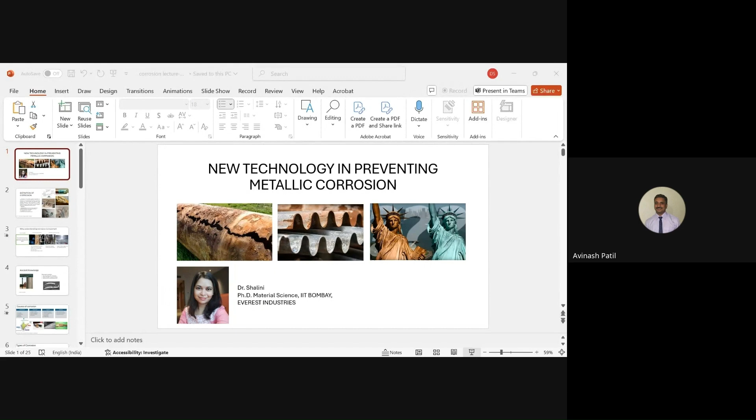Can you see my presentation? Yes, madam. So today's topic is on new technologies in preventing metallic corrosion. Madam, just interrupt, make it PPT view. Yes, I did, it is in PPT view only. Full screen is not there. Okay, let me. The corner icon, yeah that one. Can you see now full screen? No, madam, or else you have to share the entire screen. Okay, okay, I will do that. Just a second. Is it okay now? Yes, yes, it's okay now, you can continue madam.

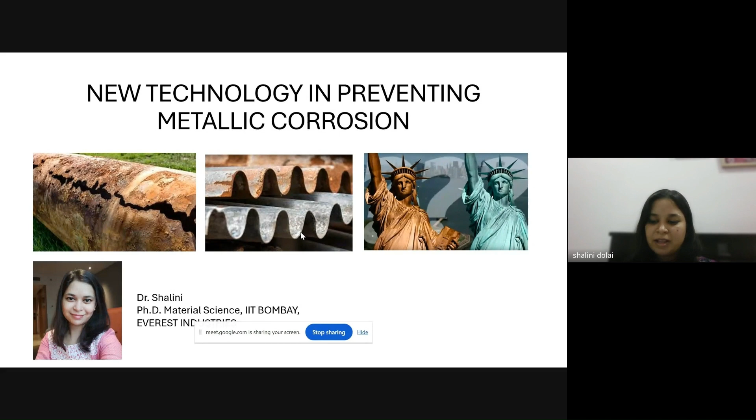Thank you. I don't know how many of you are aware of material science and the corrosion stream. It is not a very common subject, but there is a huge demand for this role in India. We have been looking for material scientists, electrochemists, and corrosion engineers in our field, but it is extremely difficult to find them. So in future, if you want to do your masters and PhD, this could be a potential subject, because today I'm going to present how we solve some industrial problems with this knowledge.

Before going into the case studies, I would like to give a small introduction on what is corrosion and why it is important to understand it. Corrosion, in simple terms, is a reaction of any metal with oxygen, carbon dioxide, humidity, or any pollutant in the atmosphere, and this metal gets converted into oxide, and that metal oxide will have detrimental properties which can lead to a lot of accidents. That is called corrosion in general terms.

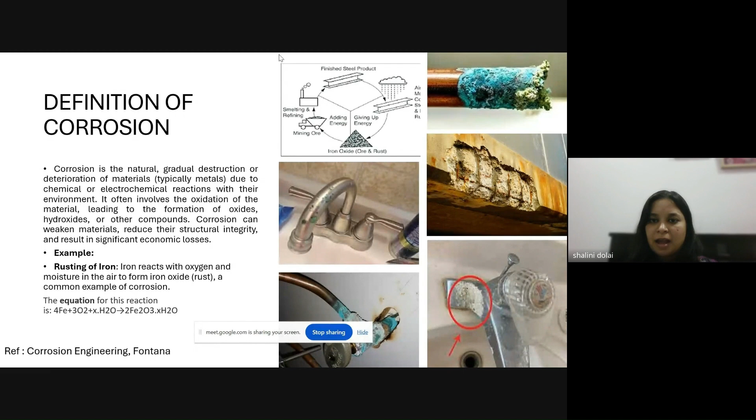But in terms of thermodynamics, I will take an example of iron. Iron is usually present in nature as magnetite or iron oxide. So what happens to iron? We usually extract it from iron ore, which is an oxide, either hematite or magnetite. Then we apply a lot of energy to convert it into pure iron. Now this pure iron has acquired energy in the smelting process, and it becomes unstable, looking for a chance to go back to its original form, which is iron oxide. So whenever there is humidity, chloride, or any pollution in the atmosphere, it reacts: iron reacts with oxygen and humidity and becomes iron oxide. This is the natural behavior shown by almost all metals.

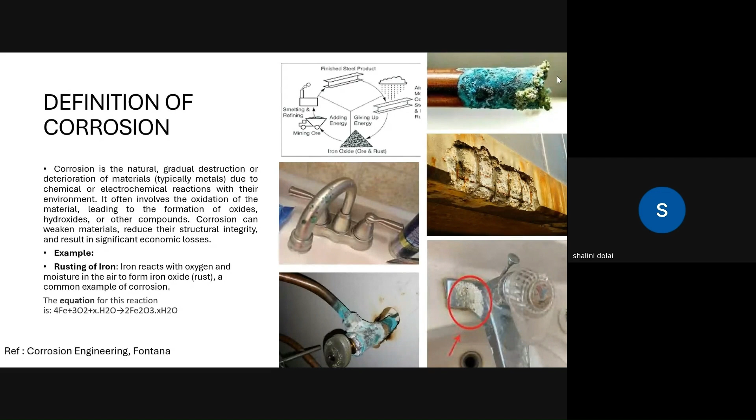So when iron corrodes, it will show red rust. When zinc corrodes, it will show white rust. When copper corrodes, it will show blue color. Can anybody guess why copper rusting shows green or blue color? Copper carbonate, yes. What happens is copper reacts with carbon dioxide in the atmosphere, or it will react with SO2 in the atmosphere and forms copper sulfate. Both of them have green or blue color, that is why we see this bluish color. So this is the basic corrosion mechanism.

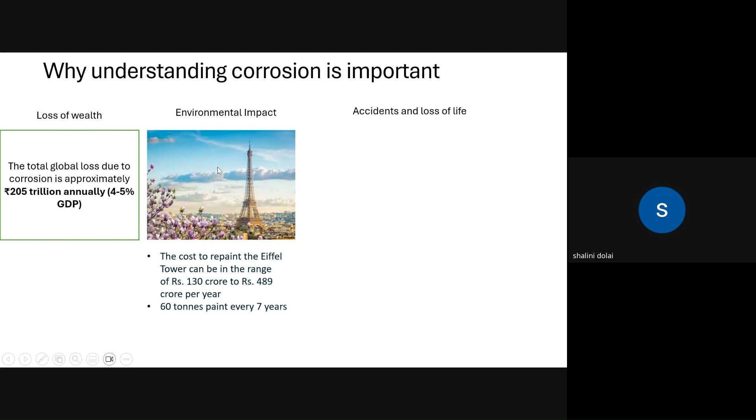And why should we study this topic? Because the global loss due to corrosion is 205 trillion rupees, which is 4 to 5% of GDP, which is huge. With the knowledge of corrosion, this can be prevented, and it also has a lot of environmental impact. You all love the Eiffel Tower, right? And it looks beautiful, but if you go near it and see it, this is how it looks, because it is made of wrought iron and is highly vulnerable to corrosion.

And Paris spends almost 130 crore rupees per year to repaint it. Almost 60 tons of paint get consumed every 7 years. The kind of VOCs that are generated due to this paint have a huge environmental effect. And there are accidents and loss of life.

One example is the Bhopal gas tragedy, where the metal pipes were corroded due to this MIC gas. There was no monitoring, due to which the leakage happened and many people lost their lives. This could have been prevented.

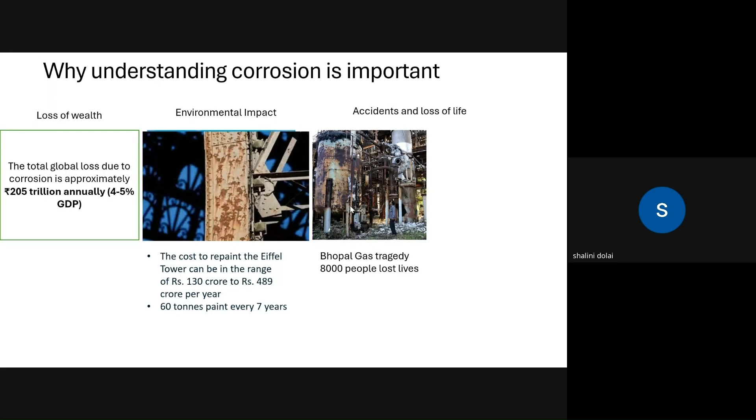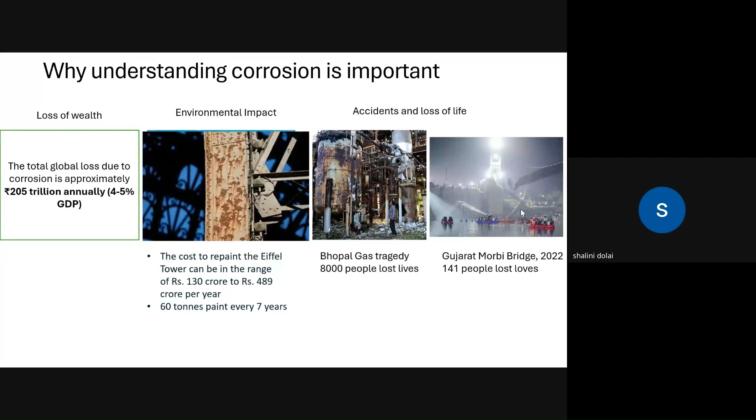And you may think that these are very old cases, like the Bhopal gas tragedy, but recently in Gujarat, in 2022, 141 people lost their lives because there was an accident at the Morbi bridge, where the bridge got corroded. It was supposed to be replaced with new material. Instead, it was just painted, due to which many people lost their lives. So even today, these kinds of accidents happen, and that is why this knowledge is very important.

But why are we facing these issues? Don't we have this knowledge? The answer is no, we had this knowledge. One example is the Delhi Iron Pillar. Just imagine, it was built 1600 years ago, and till now it doesn't corrode.

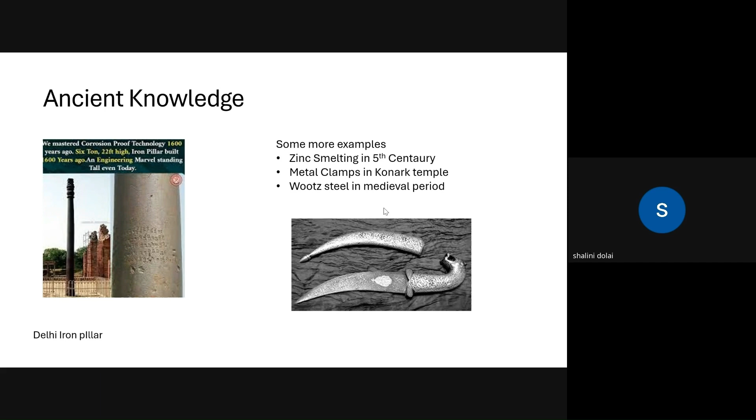And we can see similar examples, like brass, which is used in making temple bells. It was invented in the 5th century. Even now, if you visit Konark temple, you can see metal clamps which are not rusted. And in the medieval era, our kings were using weapons made of wootz steel. All these are examples of knowledge of metallurgy and prevention of corrosion, and how we can use this knowledge in the modern era, we are going to understand.

Before that, we should also understand the causes of corrosion, because many times just by understanding the cause, we can prevent it or find a solution to avoid it. The first cause is the environment. Humidity, temperature, pollution, and saltwater are the most detrimental factors. So among all the countries in the world, the most humid or tropical countries like Brazil and India are more vulnerable to corrosion. This is where we get a lot of disputes in industries.

What they found is that corrosion is not happening uniformly in India. The coastal regions, which are more hot and humid and also have chloride ions in the atmosphere, show the highest corrosion. So when you do material selection, you should keep in mind that coastal regions need special materials.

The other causes of corrosion are chemicals, basically exposure to acids or bases, then oxidizing agents, and microbiological corrosion is also very common. This usually happens in body implants, like stents and dental implants. But in India, we also have a special case which I solved during my PhD. In India, it is common practice to discharge urine on railway tracks, and that causes corrosion of the railway tracks.

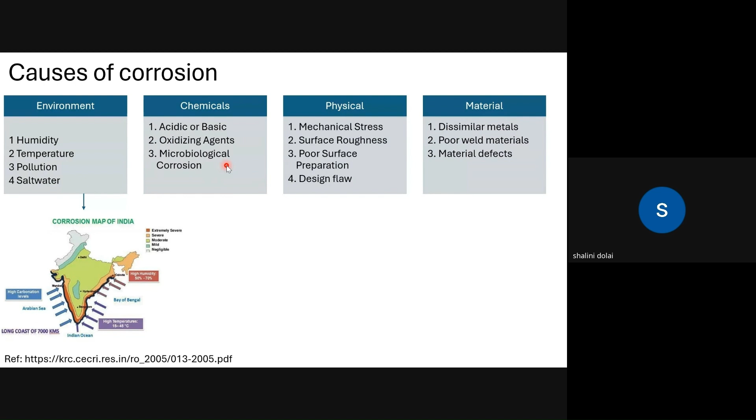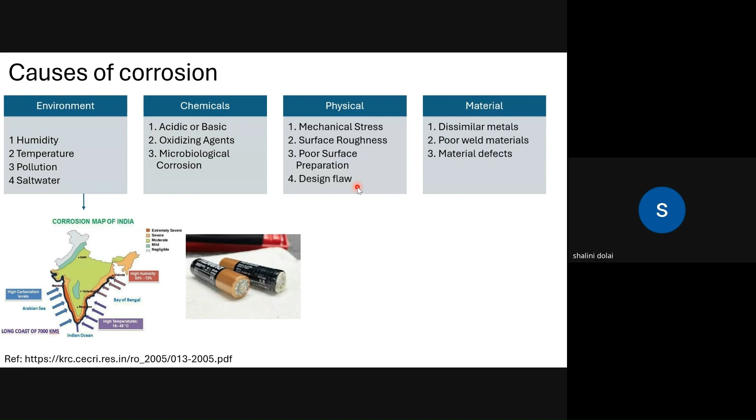Other reasons could be physical properties like mechanical stress and surface roughness. The higher the roughness, the higher the probability of catching dust, and the surface energy is high, so there is more vulnerability to corrosion. Then poor surface preparation and design flaws. And another important reason is the choice of materials.

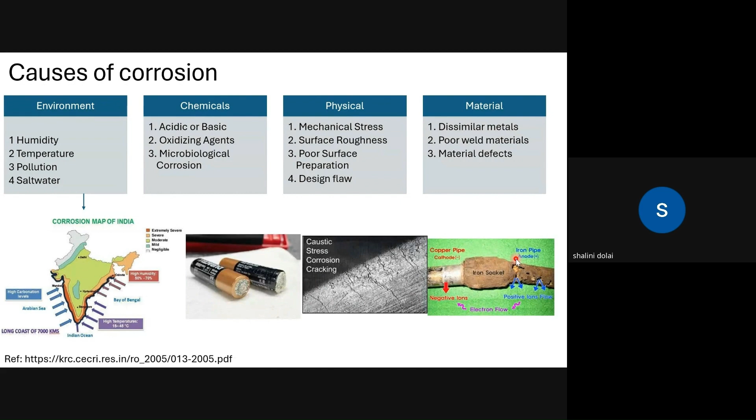So it is always better to put similar metals together. It's always preferable to avoid dissimilar metals. Similarly, while choosing weld material, we have to keep an eye on the electrode potential of the weld material we are going to use. So these are some of the causes. Now, this is not very important, but I would like to give a glance at it, because there are types of corrosion.

Uniform corrosion means, let's say you have a metal like this, and the thickness that is getting removed due to corrosion is uniform. That is called uniform corrosion, and this usually happens in rust and other things which we see at home.

And localized corrosion is very dangerous, because this could be very microscopic in nature. We may miss it. The way the pipe got corroded in the Bhopal gas tragedy, it may not be visible if you are not checking properly, and it can lead to catastrophic failure, which can be fatal.

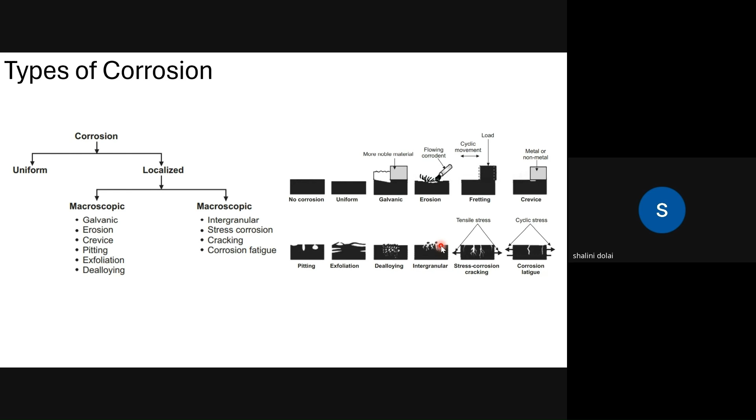So those kinds of corrosion could be due to dissimilar metals, which leads to galvanic corrosion. And if there are impurities in a water flow, those can cause erosion. And if there is some nut and bolt system moving left and right, it can cause fretting corrosion. And if you put a metal with a non-metal, the area of contact gets corroded, which is called crevice corrosion. Similarly, there are many types of corrosion, and identifying the type of corrosion can help us choose a solution for it.

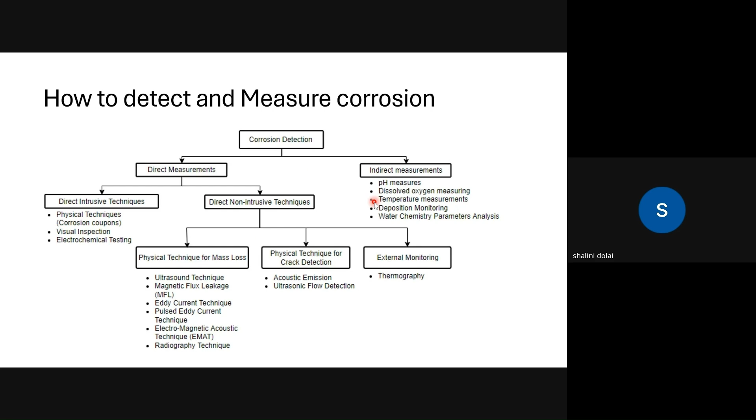Now, how to measure it? There are many methods, direct methods and indirect methods. In direct methods, you can go for physical techniques like visual inspection or measurement of loss of thickness or weight loss, etc. But these are not very efficient. If there are localized defects, you need some advanced technologies. There are many technologies, but what we mainly use in industry is electrochemical testing, like linear polarization resistance and electrochemical impedance. We don't have to go into detail, but the basic principle is electrode potential.

So how will you check the structural integrity of a bridge or a building? Inside the concrete, you have iron bars. You cannot see them from outside. How do you know whether the iron bar is healthy or not? Do you have any idea how you can check the quality of that iron bar? Any guesses? I think I got some answer in the message. Okay.

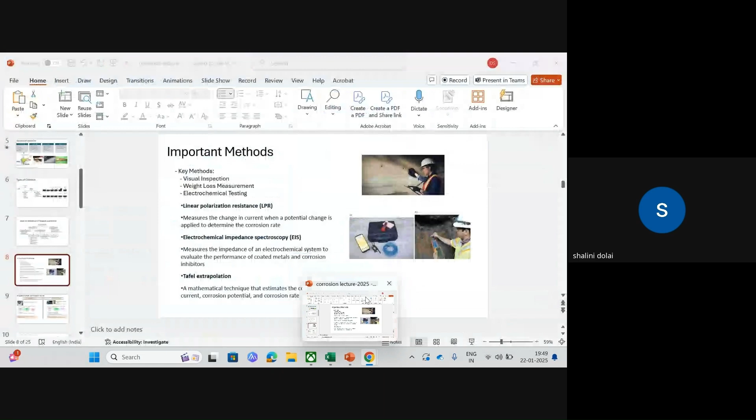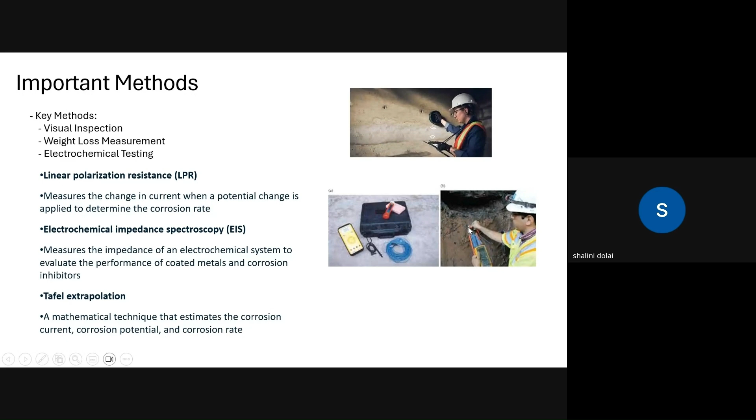So what we do is we put one electrode inside the concrete, and that electrode touches the iron rebar, then it measures the electrode potential. The more positive the electrode potential, the better it is. If the electrode potential is negative, then it is prone to corrosion and it is time to change it. This is how the structural integrity of buildings or bridges is monitored.

Now, natural corrosion is one side, but when we develop a new material, we cannot wait 1 to 2 years for it to corrode. We want to develop our materials within 3 to 6 months. In that case, we develop accelerated corrosion test methods, where we use a chamber like this, and there will be a cycle of humidity. Then a very concentrated salt solution keeps falling on the metal coupons which you keep here.

We usually accelerate the process so that, if I have three materials, like material A, B, and C, we can understand which one has maximum resistance to corrosion. That I can study using this machine, which is called the neutral salt spray. I can put those materials inside it and I can check the weight loss.

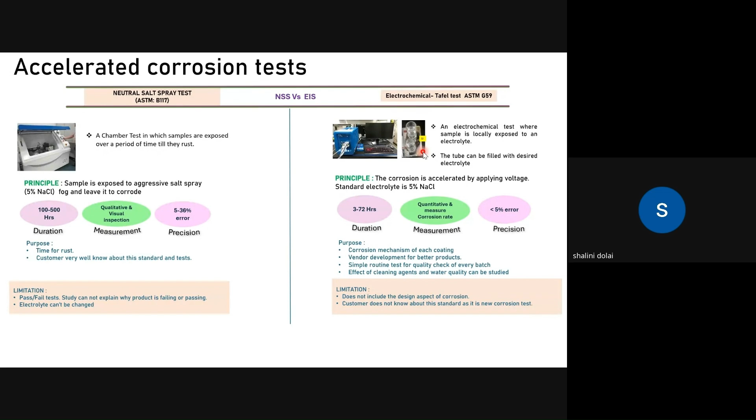And the other method is the electrochemical test method. Till now we were talking about electrode potential, right? So oxidation happens when the metal gets disturbed from its natural electrode potential and shifts towards the negative side. So here we apply voltage and forcefully try to shift it to a negative electrode potential, where the material starts corroding, and then we can measure the corrosion rate. These are the common methods used in industry for new method development.

Now, this is the setup used for the electrochemical technique. This is called a potentiostat, and you can place your working material here. This tank is filled with NaCl, sodium chloride, which is highly corrosive, and using a computer, you can record all the data. You can calculate the corrosion rate using this formula, and when you have three different metals, let's say gold, copper, and iron, the corrosion rate of iron will be more compared to copper compared to gold. I can get that sequence within half an hour using this system.

So I will explain one case study; the topic name is galvanic protection. We feel that in order to avoid corrosion, we have to apply a coating, right? The answer is right, but there are other methods. For example, you can see these patches. This is a ship hull, which is made of mild steel. And next time when you go to some port, you can observe it.

There are some zinc blocks kept here. So what happens is these zinc blocks supply electrons to your ship hull. And whenever a metal becomes electron rich, it becomes corrosion resistant. That is the basic mechanism, and that mechanism is called galvanic protection. You can see these kinds of applications in automobiles, furniture, etc.

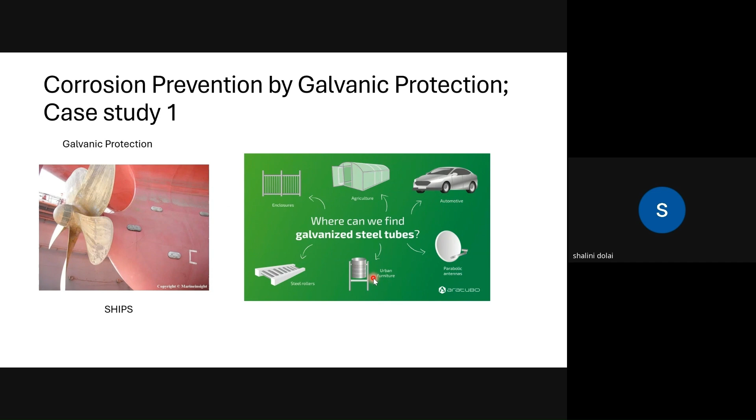You might have seen partition boards like this, gypsum partition boards, and then ceiling. Usually you don't see any metals outside, but inside, if you see, there will be a skeleton structure like this. Usually this is galvanized steel. So our company gave me a case study that in many places in India, after some days, some red color bleeding is happening. Why is it happening and how to stop it?

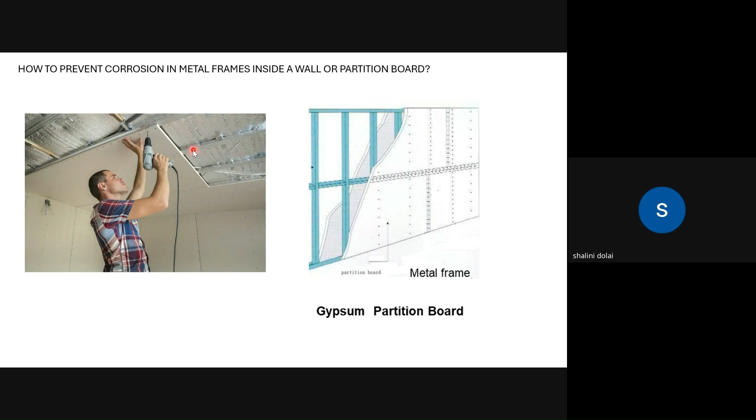The moment I heard it, I knew that it is happening due to corrosion of iron. What we were using was pure zinc, 99% zinc on iron. Zinc keeps donating its electrons to my iron to protect it. While donating these electrons, the zinc gets consumed and it completely goes away from the system. Once the entire zinc is consumed, iron starts corroding and that red color bleeding happens. So using only zinc is not useful.

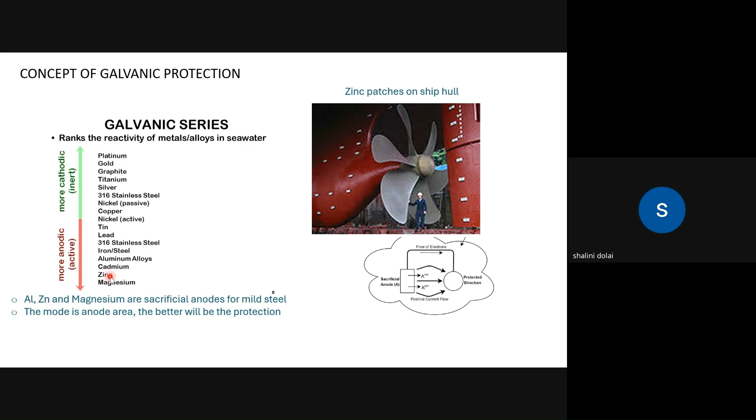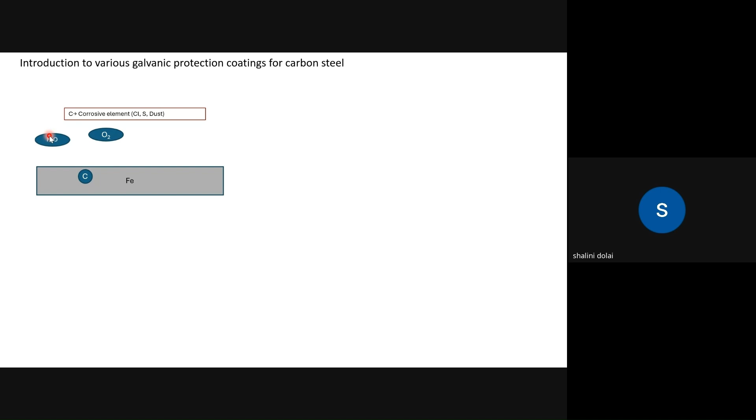So what happened? Here is the mechanism that you can understand. I have one iron. Now in my atmosphere, there are corrosive elements, oxygen, water. It sits on the surface of the iron. Wherever it sits, from that part, electrons start transferring to the other part. This part is called the cathode. And since the electron is removed, here the metal gets oxidized and it forms iron oxide.

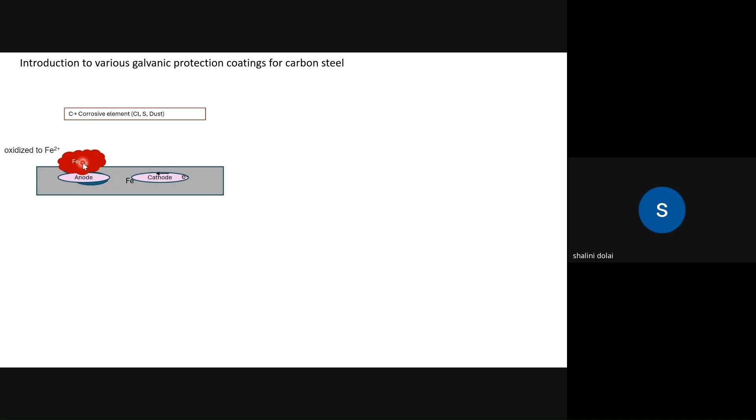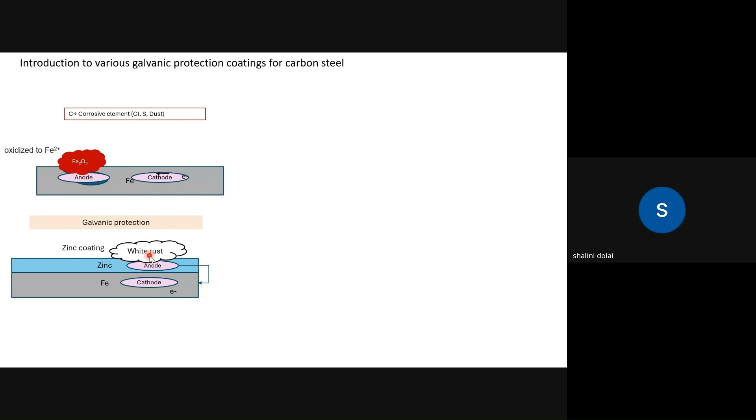Now what we were doing, we were applying a pure zinc coating. Zinc is giving electrons to my iron, it is protecting, but in this process it is getting converted into white rust, and this white rust is very chalky and powdery. It is getting removed from the system. Once all the zinc is consumed, my iron is corroding.

So what we did, we went for another coating, which is aluminum 55% and zinc 45% coating, where zinc and aluminum both supply electrons to iron, but aluminum forms aluminum oxide in this process. Unlike zinc oxide, aluminum oxide is stable and forms a passive layer, so it delays my corrosion. But due to these big chunks of aluminum oxide layer, the coating was brittle. So whenever there was some mechanical impact, the coating was breaking and again the corrosion was happening.

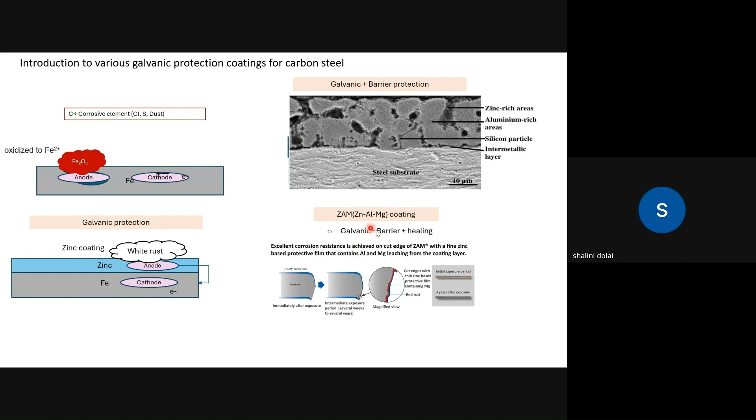Now the third approach was to go for zinc aluminum magnesium coating, which is flexible like zinc coating but has double electron protection from zinc, aluminum and magnesium. And the magnesium ions can migrate in my system, and wherever there is a cutting, they can travel to that part and offer corrosion protection, which is called healing.

I hope I am not boring you. In case you have any doubts, you can ask me in between. No problem, ma'am. It's going on good. Okay.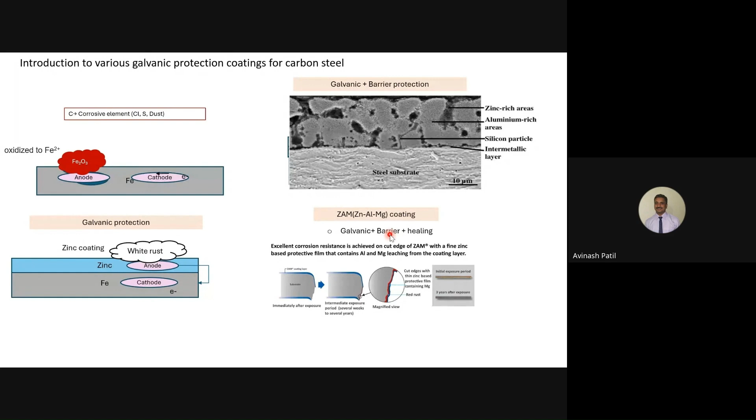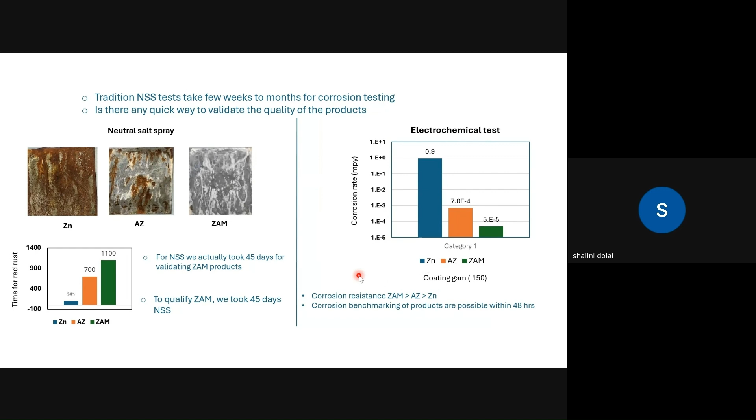We cannot quantify it. So we went ahead with the electrochemical test where we can calculate the corrosion rate directly, and here I can clearly tell it is much better. I can quantify the corrosion rate here. So this was one case study, and I explained all of this, so I'm skipping it.

Another case was the shower cubicle. In a shower cubicle, we have hinges like this. They are usually coated with nickel and chrome, and the base is made of brass. Here we have brass, we have nickel, and this 8 micron layer is nickel, this is copper, and very thin, we cannot see it in the microscope, but there is a chromium layer. Now this was showing pitting corrosion. You can see in your washrooms as well, if you have these kinds of hinges, small black dots will be there. Now how to prevent it?

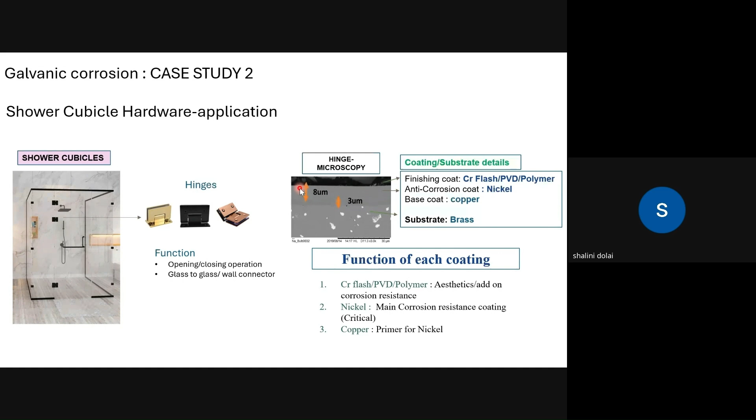Should I change my brass substrate itself, or should I increase copper thickness? Should I increase nickel thickness, or should I do something with the chromium? The game is to improve the life of the product with the least expenses. So again, we studied the corrosion rate of each layer. We tried to understand which one will act as cathode, which one will act as anode. You can see this kind of corrosion was happening.

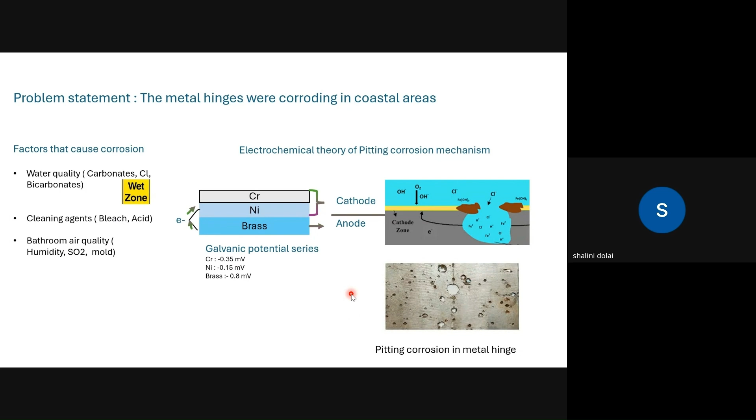So what happens is, in this case, it is reverse. Brass is an anode, and nickel and chromium act as cathode. The electrons from brass were getting transferred to nickel, and these kinds of pits were getting formed. So whenever there is bleach or air quality is bad, this kind of corrosion was happening. So again, we did an electrochemical test, and we identified the three possibilities.

We found that changing the brass grade can impact the mechanical strength. If I use some other grade, the mechanical strength will reduce, and for higher copper grade, new tools are required, which is a huge investment of cost. So this was not an option. And the top coating, which is chromium, if I change it, my aesthetics will change, and our architects are very particular about the aesthetics. So this is also not an option.

So we found that maybe increasing the nickel layer can be beneficial from an aesthetic point of view as well as the cost, and the mechanical properties will remain the same. So we studied it. We took bare brass. By keeping all other coating thicknesses the same, we just varied nickel alloy thickness, and we found the corrosion rate reduced dramatically, almost by 1,000 times, and the pitting corrosion reduced significantly. So this was one of the approaches.

Now, any doubts or discussions so far? Madam, we will take it at last. Sure.

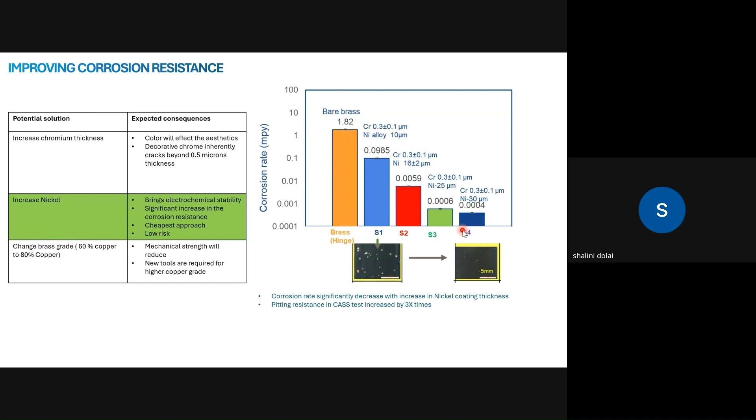Question answer session. Okay. So other advanced technologies: this is a coating which we developed during our PhD. So what is happening here? We tried to develop a biomimic of a lotus leaf. When you observe water droplets on a lotus leaf, it doesn't remain, it flows. So if you look at the lotus leaf in a microstructure, you can identify two things. There are some nano-sized bumps, and the overall surface tension of the lotus leaf is very, very low due to a wax kind of coating.

So using nanotechnology, we developed a similar kind of coating in the lab where the surface became hydrophobic. So if the substrate is not coming in contact with water, dust or anything, it becomes corrosion resistant. So how were we measuring whether the substrate is hydrophobic or not? We were using an optical camera, and this is a water droplet. If the surface tension is very high, it spreads on the surface. And as the surface tension reduces, it starts forming like a bead. So in this particular coating, we achieved 155 degrees of contact angle, which is a very good hydrophobic surface.

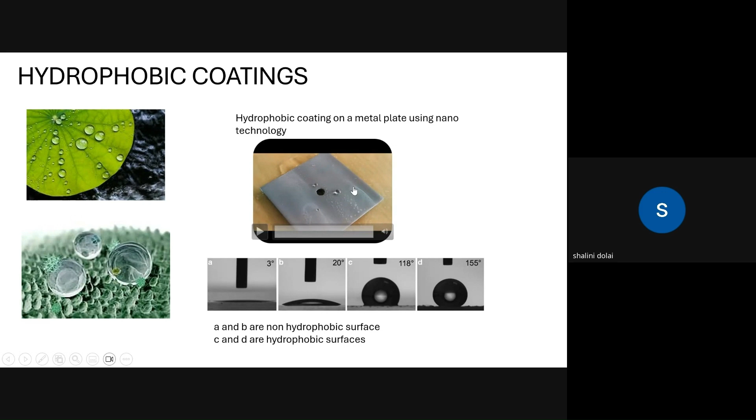How did we achieve it? So we took one siloxane coating. Siloxane coatings are known for their low surface tension, and then we added nanoparticles of SiO2, iron oxide. We explored different types of iron oxide shapes, spherical, cylindrical, then zinc oxide also we explored. Among all, SiO2 was giving the highest hydrophobicity, and that's how we achieved this coating. And this coating is being used on car windshields in high-end cars, where whenever there is fog in the atmosphere or rain, the glass will be clear.

And another coating is a self-healing coating. This coating is still under development. It is not in the market right now. The concept is that inside my coating there will be microcapsules which are filled with polymeric coating, and whenever there is a scratch, this polymer coating starts leaking, and that will start filling up my scratch. It cures when it is exposed to sunlight, and here you can see that one of the glasses healed itself, and this is a metal where a small film is formed, and this is how corrosion can be prevented. This is a metal, this scratch is the vulnerable area for corrosion, and now since it is healed, the corrosion is prevented.

There are many other approaches as well, but the main challenge to mass produce this product is that making these capsules is very expensive. The procedure is very difficult, encapsulating the polymer inside, and then even after so much effort, it works only once. Once the polymer is leaked and it forms a film, it is consumed. If there is another scratch, there is no healing effect. So now there is research happening for better mechanisms to achieve this property, like geopolymers, etc., which cross-link themselves.

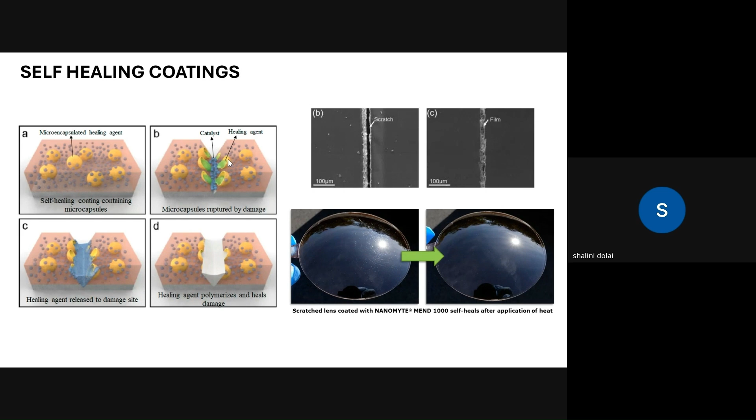And then this is another case which we used in Saint Gobain. So what was happening? We wanted to use artificial intelligence to predict corrosion. So earlier I showed you the neutral salt spray test, which takes 45 days, and even the electrochemical test has limitations. If you have big parts, you cannot measure it. Electrochemical measurements are limited to very small sample sizes.

So to overcome these challenges, we thought, can we predict corrosion? So whatever studies we were doing in the lab, we were feeding them to machine learning software offered by Comsol. There is a company called Comsol, where all the data or learnings, all the experiments which we are doing in the lab, can be fed into it and it learns. And then here is one case study that we did.

So we had this nut and bolt system, and let's say I am using one steel substrate and I am putting zinc screw, or vice versa. If I am choosing some dissimilar materials, if I'm changing the material, what will happen? If I'm using a magnesium alloy washer, then what will happen? Without doing any experiment, can we simulate that data?

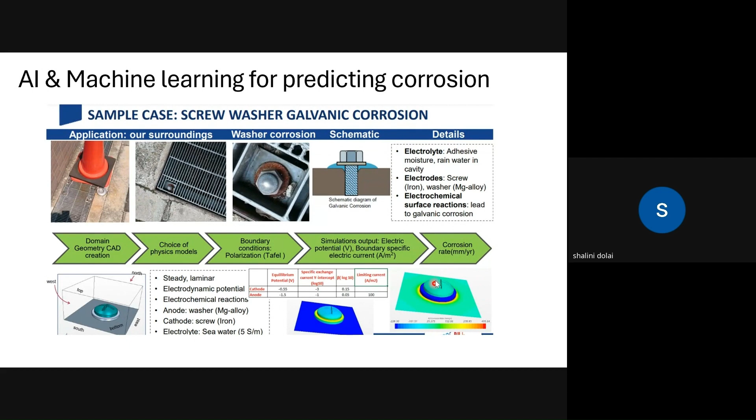The washer got corroded because among all the materials which we use, magnesium is having the most negative electrode potential, and it was vulnerable to corrosion. So without doing any experiment, this was able to predict. When we use these kind of systems, our time for experimentation gets saved. We get the output very quickly. So that is the role of AI moving forward.

Let's say, what is the catalyst that is accelerating the corrosion rate, or how to develop 3D models, which part of your entire product could be the most vulnerable area for corrosion, and accuracy, reliability. And in many cases, the corrosion tests are being done using acids, and it could be risky to humans. In such cases, AI can be used. So this is the role of artificial intelligence in coming future.